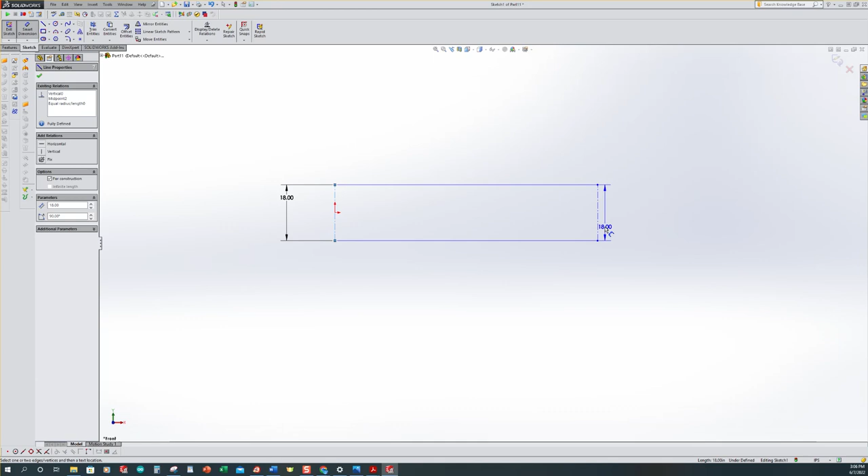So, smart dimension, grab the leftmost vertical line. I would like for it to be 18 inches. And if memory serves me, it was 240 inches from the left side to the right side of our I-beams. So, one selection point, second selection, place it down, 240.

We are now fully defined. Click out in the modeling space. Everything is black. Look down to the bottom right, and it is fully defined, so we can now exit the sketch. After you exit the sketch, make sure you hit escape once or twice just to clear this out, because we're going to continue sketching, and we need independent sketches.

So we're going to come back to our sketch tab, select sketch. It's going to ask what plane we want to create it on. Mine are turned off normally. I want to come up and select the front plane.

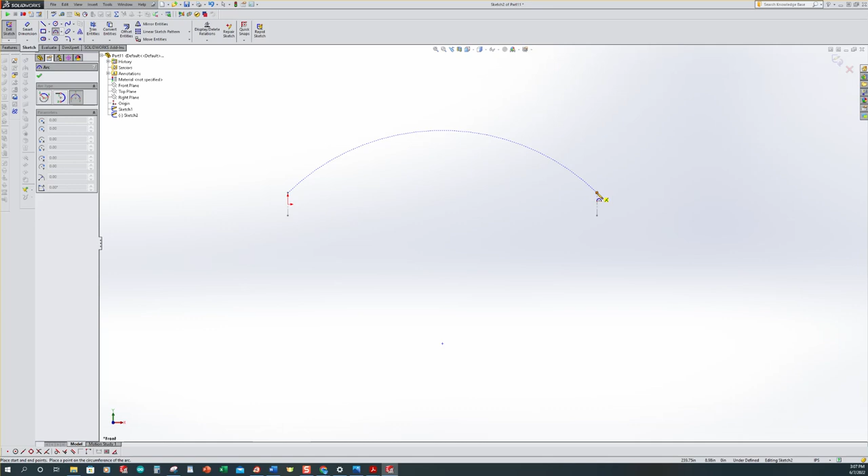And now we are going to use a 3-point arc. We can drop this down; there are all sorts of different arcs. So, 3-point arc. We want to make, I think, 3 selections. So one mouse click on that vertex, a second mouse click on this upper right vertex, and now I can drag this radius up or down whichever way I want.

If you grab it over here at the end, it's kind of hard to control, but if you grab it more towards the center of the arc, it's a lot easier to control. So I want to place it here. That was our 3-point radius.

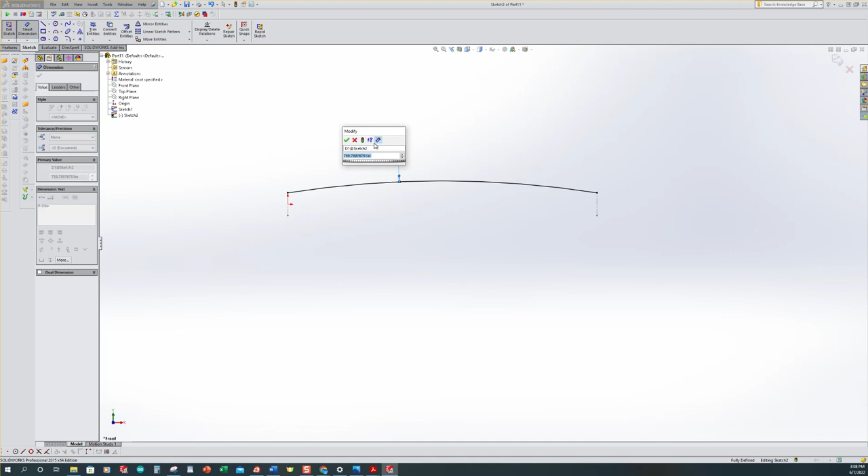Then we need a smart dimension, and I'm going to pull it up and place it down, and to my knowledge it was 1000.

This sketch, once we select out in the modeling space, is also fully defined. Look down here. So we are good to exit this sketch. Now when I just exit the sketch, notice how this line is still pretty dark and black, and the others are ghosted out. If I hit my escape key once, that gets me out of that sketch altogether. If I'd selected the sketch button, I would have gone back into it.

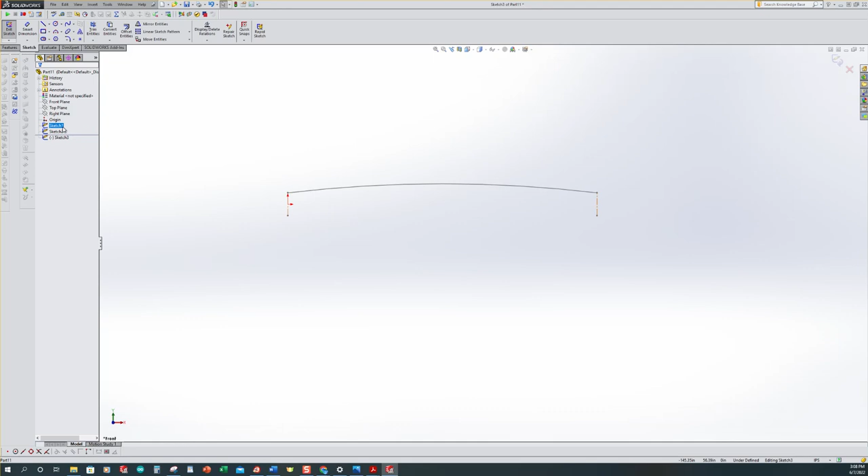But in this case, I want to draw my bottom profile of the I-beam. So we want to select the sketch icon. We're still going to be continuing on with the front plane. So we now have sketch 1 and sketch 2 above this line, and this sketch is what we're currently working on. This is the work in process.

So let's come up and select a regular line. Come to this vertex, pull it down. I don't want it to snap horizontal. I'm just going to give it a little bit of an angle. You can exaggerate it if you need to.

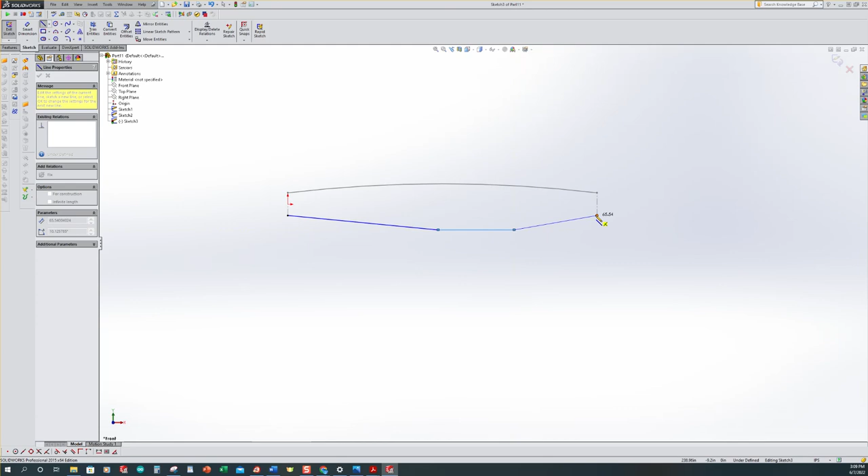This one I do want horizontal, second mouse click, and we're going to terminate the sketch with the bottom vertex of our first sketch line. So we can associate this to other sketches, which makes life really easy. After we've done that, we would want to come up and select a smart dimension.

So we got 48, 130, and 240 overall. We don't have to worry about the 240 because it's already determined by these two marks. So it's 175 degrees. So that's 130, 48, and 175.

So smart dimension, I'm going to start with my smaller one first. I'm going to grab that center horizontal line, 48.

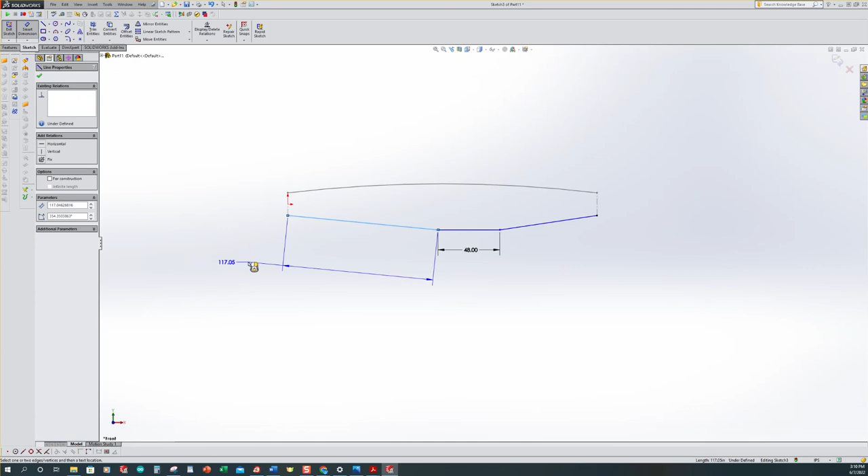This next line, now if I pull it out like this, it gives me a parallel dimension. It's not what we want. That's not the way it's called out on our drawing. Pull it back into this quadrant. That is what we want because this is like a horizontal, so just make sure that you pay attention to where you're placing it.

You can mess your model up even though the numbers are right, it's really not defined properly. So I'm going to place this down.

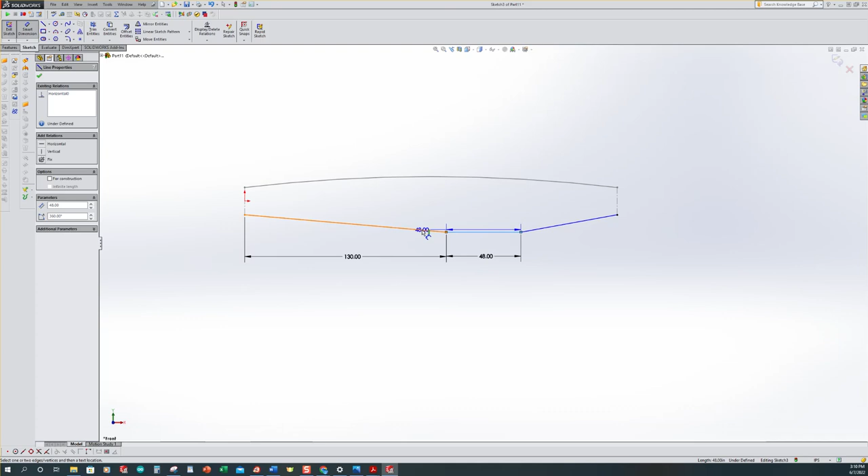So that's 130. And last but not least is going to be the angular dimension between these. One mouse click on that line, second mouse click on that line. I'm going to pull it up and place it in this quadrant, and it is 175.

Click out in the model space, and we are fully defined. We are also fully defined down here, so we are confident that we can exit this sketch as well. So I'm going to exit the sketch.

Notice this one is completely black, and these are ghosted out. If I select the sketch again, it puts me back into that. So I want to make sure that I exit the sketch and that I hit escape a couple times.

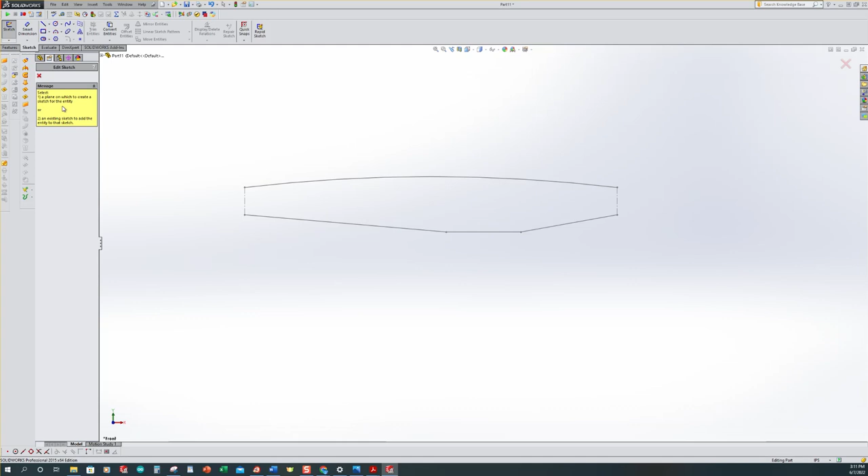Alright, so the next sketch is the profile of the I itself. So we want to select a sketch. It's going to ask us what face or plane. We want to select the right plane. So select the right plane and then Control 8.

Now occasionally you can draw over here and it's going to become relatively complicated to keep all of these things separate in your mind. So what I'm going to do is draw a letter I out here to the side, just using a regular line.

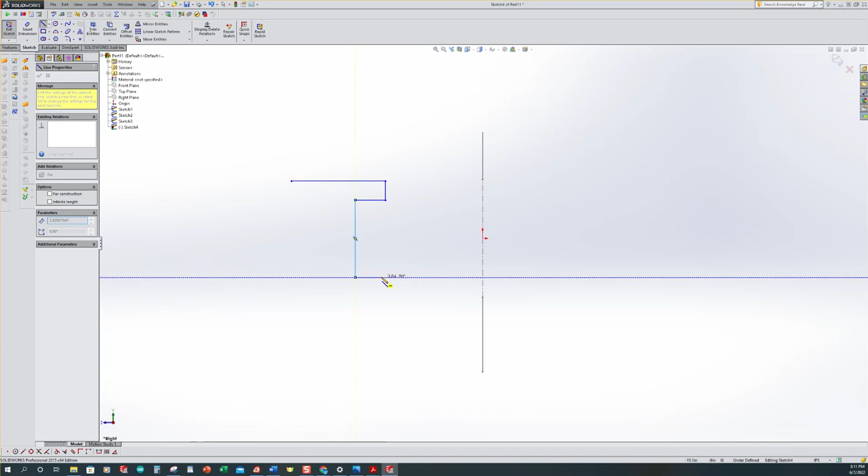So now what I want to do is go ahead and add a few relations. So with this line selected, I want to go ahead, because I didn't hit the escape button, select this vertical line and this vertical line. I'd like to make those equal.

Now I want to select this horizontal line, this horizontal line, this horizontal line, and this horizontal line, and make those equal. So now we've got the I shape pretty well buttoned up to help us keep it oriented when we start dimensioning.

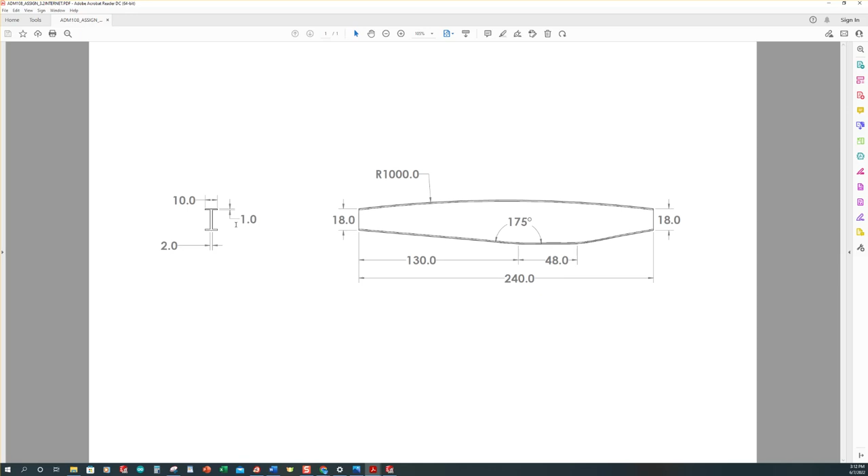So I want us to come up and select the smart dimension. I'll look at this, and it's 10 inches wide, it's 1 inch here, and it's 2 inches over here. I don't have to worry about the overall height - I'm going to show you that in just a moment. So: 1, 2, and 10.

So smart dimension, we have 1. Between here, we have 2. Up here, 10.

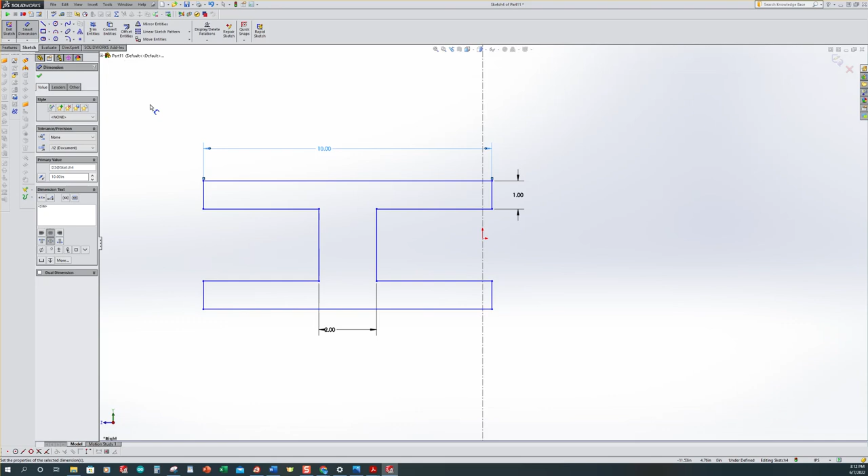Alright, so we'll roll out just a little bit. My middle mouse key is giving me fits, so I can take it and rotate it around like this. So we have our dimensions on here, but we don't have it related to these other sketches.

So now what I want to do is come up here to where it says display and delete relations. I want to drop that chevron down, and I want to actually add a relation. So there's no relation selected in our entities over here.

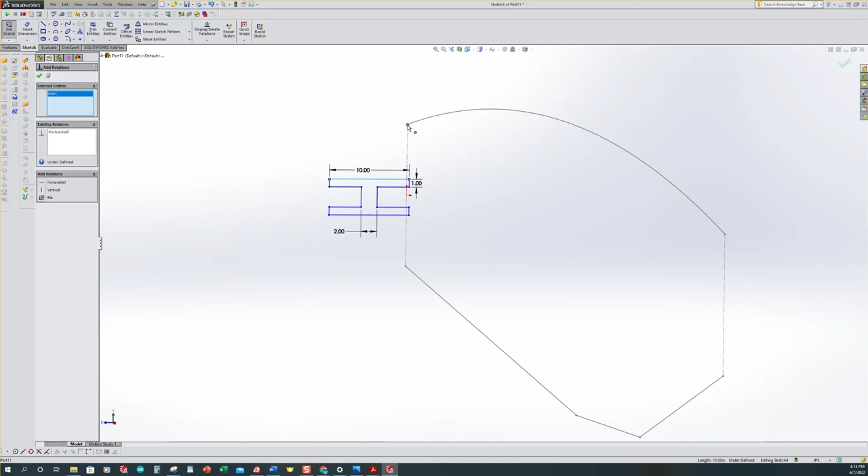So I want to pick this upper horizontal line, and now the end point of our first sketch, and I want to make it midpoint. Notice things are tying up over here.

So now if I don't have to get out of adding relations, I can pick something completely independent of those two. So next I want to pick this bottom line and our bottom vertex, and I want to make those coincident.

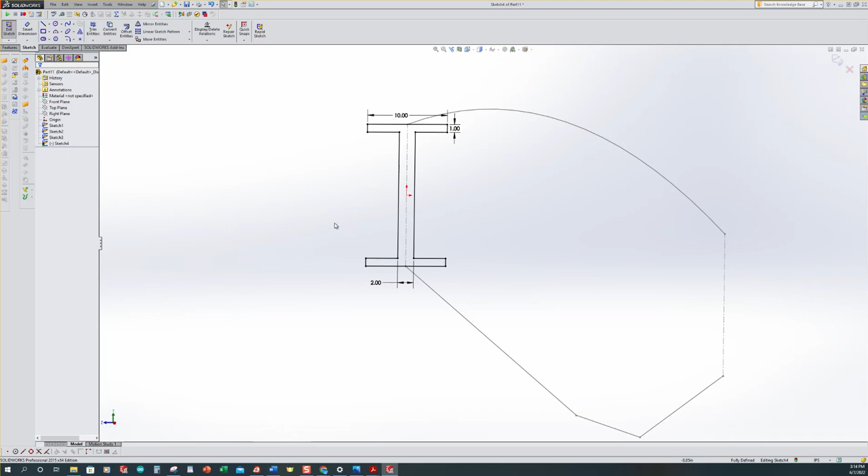Click out in the model space, or accept it. Click out in the model space. Our sketch is fully defined, so we are ready to exit the sketch and accept that and move forward.

Everybody click out in the modeling space again and Control 7. So this is what your sketch should look like. If it doesn't, we need to go back and make some corrections.

We have 4 sketches, and 3 of them are going to be required for this. One of them was just put there for reference. Those center lines and construction lines are really helpful when you want to do something along these lines.

So now we're done with the sketches. We come to our Features tab. We want to select the swept boss base.

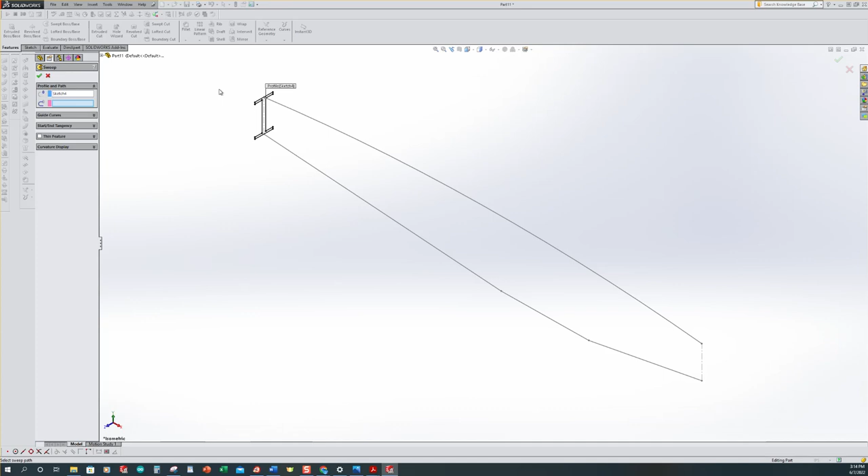This is going to be a little different than the last time. So the profile we want is the letter I, so it goes and selects all of that. The path, I'm going to pick this bottom path to begin with - no particular reason why. And then options.

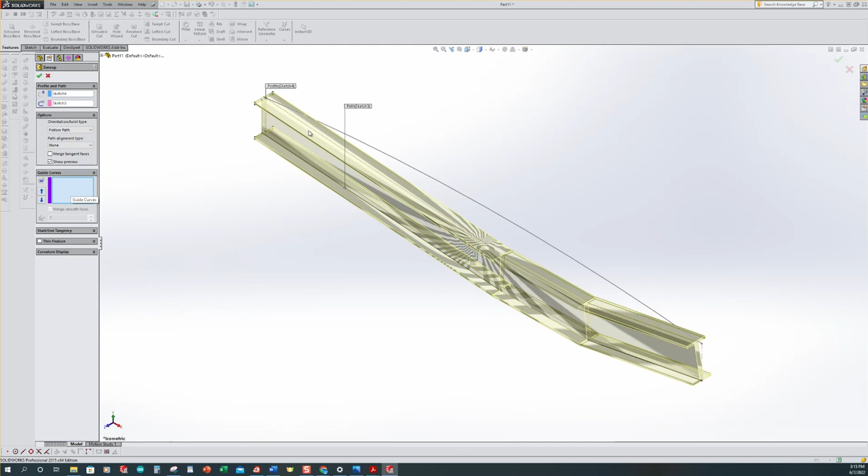I want to drop this down. Following path, I think that's correct. Guide curves - now our guide curve is going to be this upper arc that we drew.

I do notice that I have something wrong right here. The end of it is not going all the way to the end, so it wasn't follow path - it is going to be keep normal constant.

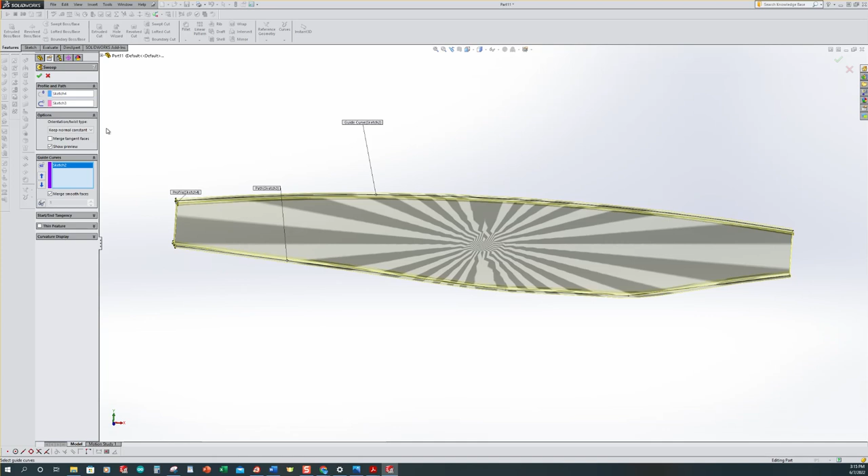And now we have an I-beam that is extruded all the way, or swept all the way down. So accept that, take a look at your model, roll it around, Control 7, and we want to save this as the proper naming convention and submit that in your LMS.